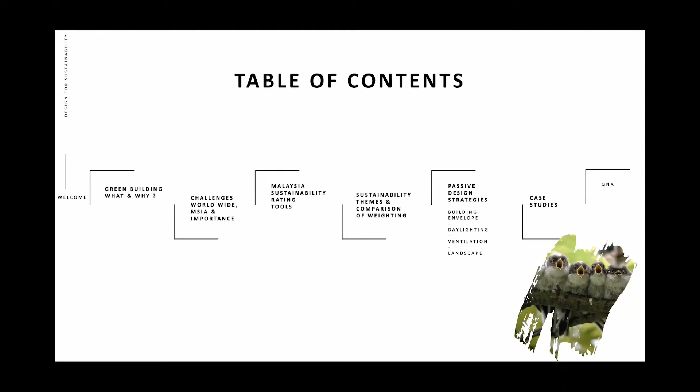I will start with what is green buildings. I believe everyone's heard about green buildings. But to be exact, a green building is an environmentally sustainable building to reduce the overall impacts of the built environment on its surroundings. It focuses on improving the efficient use of resources such as energy, water, materials, while reducing the impacts on human health and also the environment throughout its life cycle. So how can it be achieved? Usually it can be achieved through design, construction, operations, maintenance, and also some renovation projects.

Like the igloo, which is well known as the solution for these conditions, as it's designed to orient the entrance away from the prevailing winds and also to prevent hot air from escaping, so that the interior temperature can reach 15 Celsius when it is negative 26 Celsius on the outside. For the hot, arid climate, the adobe roof and wall have high insulation values and the windows were small to prevent the glaring sun.

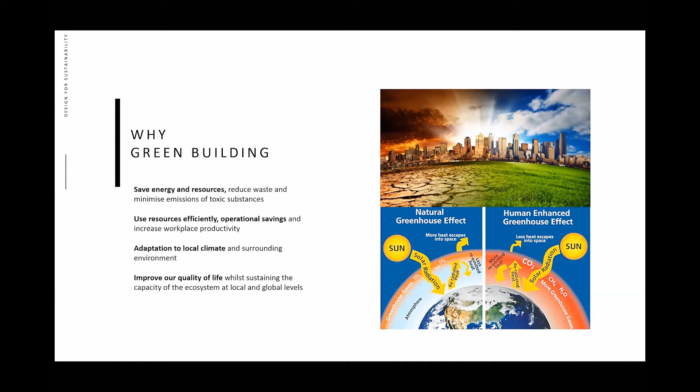So, the contributions of green buildings in the fight against COVID-19. Right. In the times of the COVID-19 pandemic, there are some studies published by the Organisation for Economic Co-operation and Development, abbreviated as OECD, together with the World Green Building Council.

They have highlighted that this new normal has demanded housing schemes emphasize flexibility, community, and sustainability, which they have summarized into 5 pillars: providing the basic functions for epidemic prevention and control, providing convenience and facilities for prevention and control, reducing the risks and preventing infections of the pandemic, protecting the health of the occupants, and stabilizing the work and living environment.

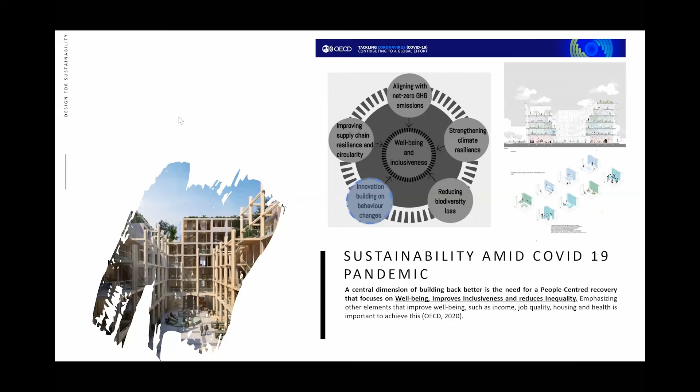Okay, GreenRE, GBI and the KSP Iskandar basically offer assessment for both individual buildings and the whole township. In terms of the tropical focus, Green Pass, MyCREST, Malacca Green Seal, and the PH JKR offer assessment for individual buildings. The LCCF and SUSTES are applicable for townships only.

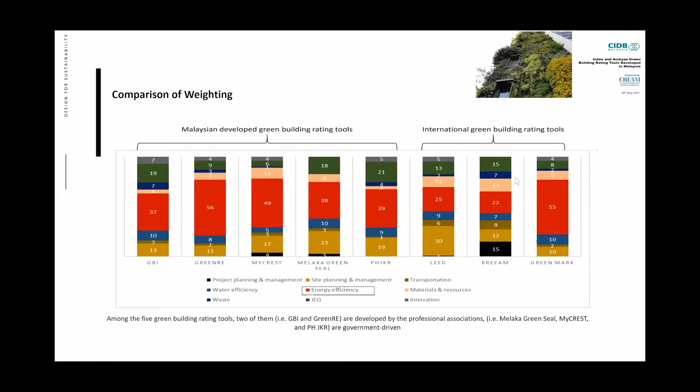Okay, the purpose of green rating tools is to optimize building performance and reduce environmental impacts through the provision of measurements of building environmental effects, and also a standard that allows buildings to be judged objectively based on these 9 primary themes of sustainability, as I mentioned just now: project management and planning, site planning, transportation, energy efficiency, water efficiency, indoor environmental quality or IEQ, material resources, waste management, and innovation.

Okay, now I will move into the passive design strategies. I will start with the building envelope design. So what is a building envelope? I believe that some of you, when you start with your design, after you complete your layout, you start to look into the building envelope. So before that, we will start with the definition of the building envelope.

It is actually the external portion of a building through which thermal energy is transferred. You know, we always look at the aesthetic part of buildings, but when you look at it from the sustainability perspective, we look into how the thermal energy is transferred, because most of the thermal energy will transfer through the building envelope.

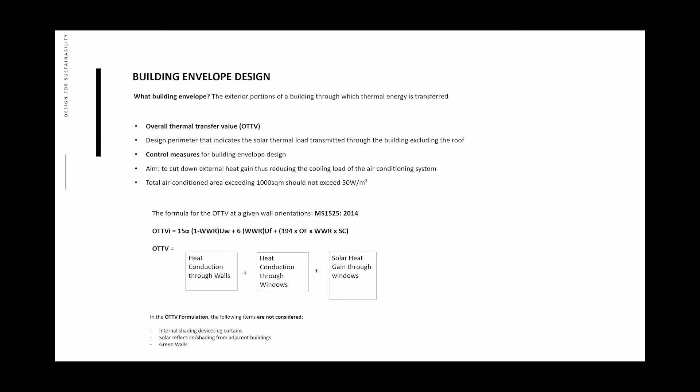However, in the OTTV formulation, there are a few items that won't be considered. For example, internal shading devices like curtains, solar reflection and shading from neighboring or adjacent buildings, and also green walls, because all these things are not permanent or fixed in the building.

So now I will look further at heat conduction through the wall. From the equation I mentioned just now, there is an alpha. Alpha is the color of the wall. When you design a building, some of you would like to have a darker facade design. This will contribute to a larger alpha value compared to lighter colored buildings.

Second is the window to wall ratio. As I mentioned, the size of your openings and the number of your openings will affect the heat transmitted into the space as well. And the U value: I have a calculation of the U value here, because the total U value depends on the thermal resistance of the materials.

Okay, this is an example for a plastered brick wall, with details here. For the external facade, there is cement plastering, then the brick wall, which is covered by plaster on the internal surface too. All these layers sum up to the total U value based on their thermal conductivity, their thickness, and their density.

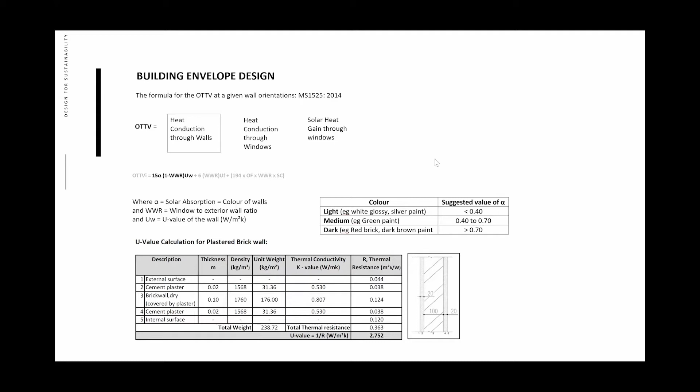Okay, next I will talk about solar transmission through the glass, which is the second part of the OTTV, the heat conduction through the window.

As the sunlight strikes the glazing, part of the solar radiation is transmitted through the glass and proceeds to heat up the interior spaces, because the glass is where the heat actually emits to the spaces. And part of the solar energy is reflected off the glass depending on the angle of incidence.

And part of the solar energy is absorbed into the glass, and then it will re-radiate both inwards and outwards. Some of the light will be reflected outside, and most of the light will probably be transmitted into the internal spaces. So to avoid heat entering the building, it's critical to prevent the initial transmission through the glass.

So from what you can see, the formula of the OTTV for a given wall orientation; of course the building has a few orientations, north, south, east, west, so we have to take all the orientations into consideration. This is the part for heat conduction through the windows. The equation will be 6 times the window to wall ratio and the U value for the glass. So how are we going to get the U value for the glass? We can look further.

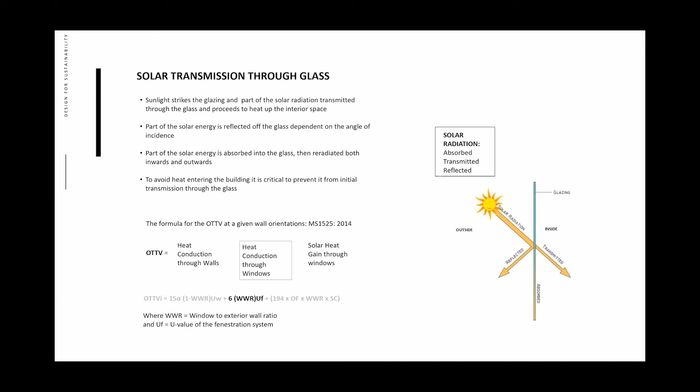Okay, here are the equations of the U value of the glass. It will be based on the glazing type. For single glazing, which is single clear glazing, the U value will be more compared to double glazing with low E glass. So if you have a large U value, it will affect your OTTV. It means the OTTV will be increased.

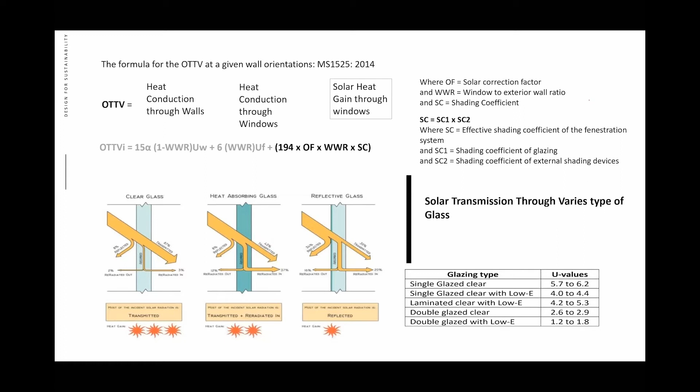So there are some photos about what clear glass is and how heat is transmitted into the spaces. If you are using double glazing or double glazing with low E, the percentage of heat transmitting into the space will probably be lesser compared to buildings using clear glazing.

Okay, this is the solar orientation factor, or OF, and it is another reason that contributes to increasing the OTTV, right? Because of the orientation of the buildings: when you orientate your building towards north and south, the OF is lesser compared to orientating your building towards east and west. So you can see that orientation plays an important role in passive design strategy.

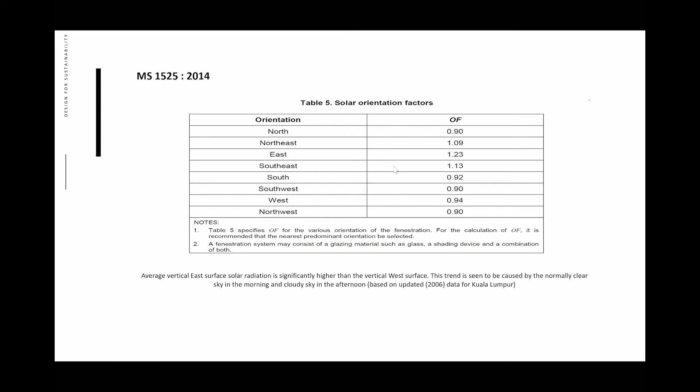Okay, now I will move into the shading device. The shading device is also part of the equation, where the shading device and the use of glazing contribute to the heat transmitting through the window. So what is a shading device? An external shading device is more effective than an internal blind.

Like I mentioned just now, it is a permanent item attached to the building, right? It comes together with construction during the construction period. But an internal blind can be removed anytime. And the external shading device will block direct sunlight from entering the building.

So here are some examples of the types of shading and how they affect the view field of the occupants. If you are using horizontal louvers, you will probably have better views compared to vertical fins, because they won't block your views. And usually you arrange them just above the occupant's eye level.

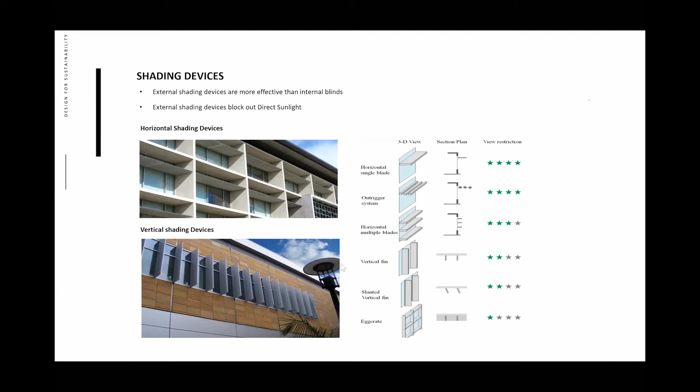Okay, now I will talk about sun path diagrams, because the sun path also affects how we design buildings to adapt to daylight. The sun path shows the path of the sun across the sky. The position of the sun in the sky is defined by two angles: the solar azimuth and the solar altitude. The solar azimuth is the clockwise angle between the north reference and the perpendicular projection of the sun onto the horizontal plane.

Solar altitude, also referred to as the solar elevation angle, is the angle between the sun's position and the horizontal plane. You can see some diagrams of the solar angles there, showing the difference between the solar azimuth and solar altitude. Figure 2 is a sun path diagram of Kuala Lumpur, and the path of the sun is represented by the curve.

So the top curve actually represents the path of the sun for the summer, which is approximately from June 21st to 22nd. And the middle curve will show March 20 to 21 and September. The bottom curve will show the winter, which is December 21st and 22nd. So this particular curve will indicate the location of the sun along the path at particular times of the day.

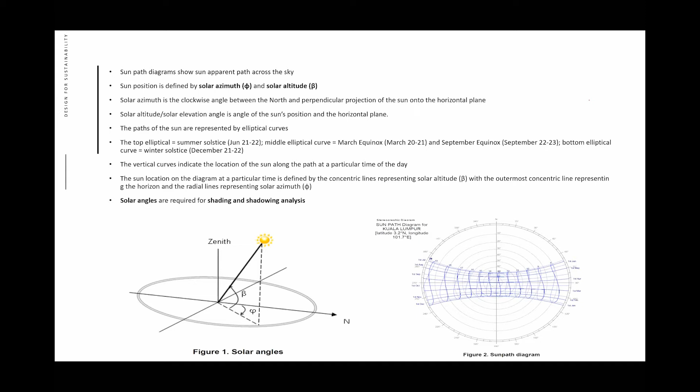Okay, for the sun shading design, you basically can use the shadow angle protractor. To determine the best sun shading design, the shadow angle protractor can be superimposed on your sun path diagram to determine the vertical shadow angles and also the horizontal shadow angles.

So figure 3 shows the superimposition of the shadow angle protractor on the sun path diagram for Kuala Lumpur. This is to determine the vertical shadow angles and the horizontal shadow angles for the northeast facade, and for each facade, the critical vertical and horizontal shadow angles need to be determined to design the appropriate sun shading projections.

And in figure 4, you can see the shadow angles and also some of the solar angles. It illustrates the various solar angles, which are solar altitude and solar azimuth, and the shadow angles, vertical and horizontal, in relation to the vertical and horizontal sun shading. So this is how they design it based on the shadow angles and some of the solar angles.

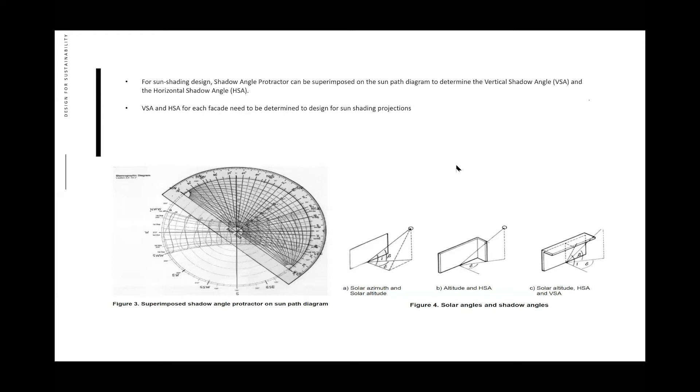Okay. We have covered the OTTV, the shading devices based on the equations, and also the orientation, the color of the buildings, the U value of the wall, and the types of glazing. We include the thermal insulation, which I will talk about on the roof. So the roof U value is worked out from the thermal resistance of the respective roof planes, based on the respective materials making up the roof.

So roof U value refers to the thermal transmittance value of the composite roof, and is inversely proportional to the thermal resistance, which is U equals 1 over R. From MS 1525, the roof of an air-conditioned space shall have a thermal transmittance; from the chart table beside, there are roof weight groups. One is light, another one is heavy roof. A concrete roof is considered a heavy roof because it's above 50 kg per meter square, so the maximum U value shouldn't be more than 0.6.

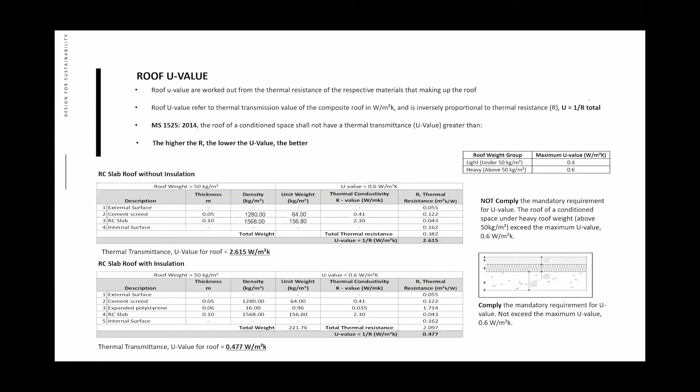Based on these equations and examples, you can conclude that to reduce energy usage in a building and enhance the building envelope design, you have to orientate your building intelligently, facing north and south instead of east and west, and use materials to control the heat.

The alpha value I mentioned earlier shows that a lighter color will help reduce the OTTV as well. So use light color paints for your wall, and locate and size the windows smartly based on the window-to-wall ratio.

Choose the glazing type correctly. Instead of clear glass, if you want to reduce or get lesser heat into the spaces, you should use double glazing and low-E glass, and provide shading to the window. You can apply horizontal or vertical shading devices to block direct heat into the spaces.

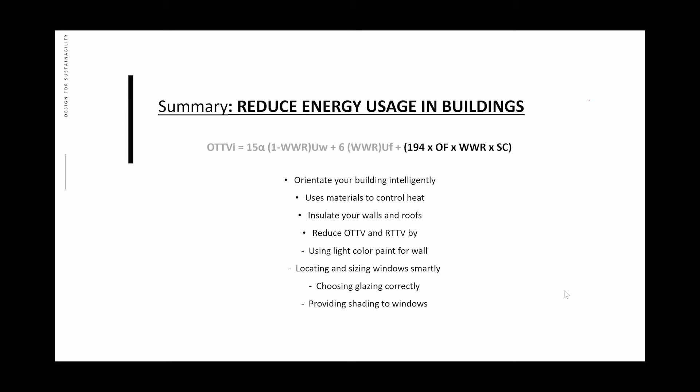Now I will move into daylighting. In Malaysia, we always design with daylighting. However, we have to keep in mind that daylighting is not equal to sunlight.

If you directly utilize sunlight, you get free heat and will heat up the spaces. Instead, you should look into the diffuse or indirect light, which is daylight, because it provides free light into the spaces.

So what is direct radiation and what is diffuse radiation? Direct radiation comes straight from the sun through the atmosphere, while diffuse radiation is radiation reflected from the entire sky.

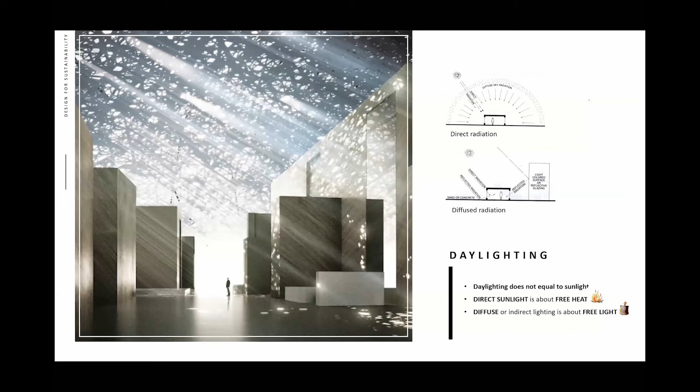Why would one be interested in bringing daylight into buildings? Firstly, it helps illuminate the building interior passively. You can save money by bringing daylight into the space to light it up, reducing the consumption of electrical energy.

In terms of cost saving, daylight could also be applied as a design element to lift up the spaces. I believe many students like to apply and explore using light and shadow in their buildings. Light is a very important tool for architecture design.

Why? Because first it brings architecture to life. You can see some images that show the experience of the user, how the user appreciates the spaces, and it can also be used to show the form and meaning of the spaces.

It's something like a journey of the spaces, where the sun comes in and creates different feelings for the user as well.

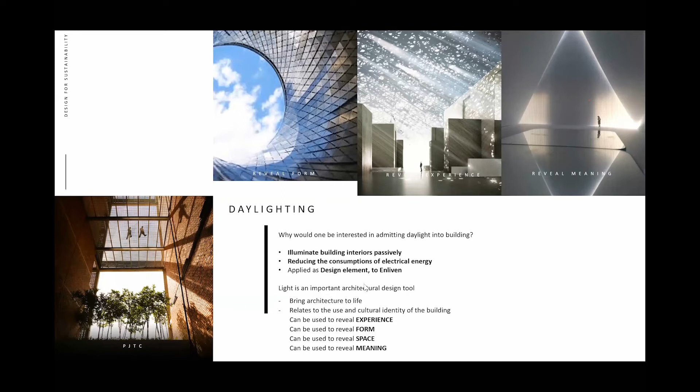There are a few ways to bring daylight into buildings. First is the light shelf, where daylight is reflected off the ceilings and enters into the building interior.

The placement of the light shelf is usually above eye level so it won't block the view of the occupants. So what is a light shelf? It's basically a horizontal plane that protrudes out from the vertical plane of your window.

The second strategy to bring daylight into a building is rooftop openings, such as skylights, because they help promote or bring daylight deep into the building interiors.

It is usually located above the occupant's eye level, and it's able to offer views of the sky and very tall vegetation and buildings.

For this type, it's a window form located either on the vertical plane of any principal elevation of the buildings, or as a vertical penetration on the roof surface. When placed on one of the vertical envelope faces of a building, its ability to admit light more deeply into the space is better than vertical windows.

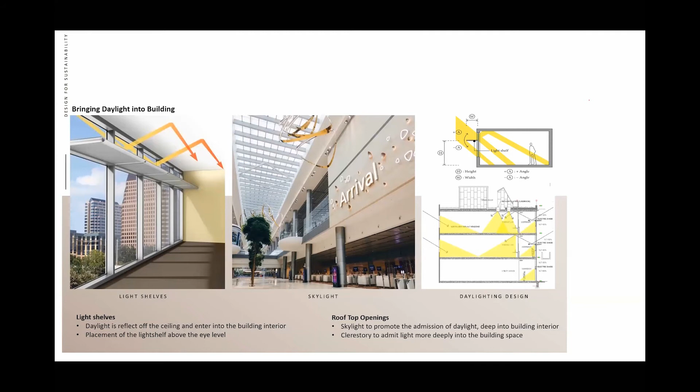So in order to bring in daylight, there are a few strategies: one is utilizing the light shelf on the horizontal plane, secondly the rooftop opening which is a skylight, followed by borrowing light from perimeter spaces. You can also combine all three strategies together.

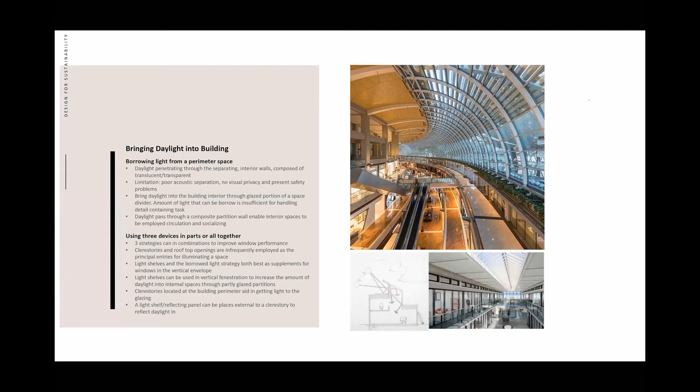Next, I will move into talking about how you go about designing for daylight.

There is the use of vegetation. You can basically use vegetation for controlling the admission of daylight, employing vegetation to reduce daylight brightness or glare into the spaces, and also consider the reflectance of surfaces external to the building.

Surfaces that have the highest reflectance, such as glossy surfaces, can actually reflect light into the building. The choice of external surface near a building can either enhance or detract from the character of illuminance within a building. For example, water bodies, liquid, or frozen surfaces display high reflectance, so these all have the potential of reflecting light into the building.

Alternatively, building materials like aluminium, standard glass, stainless steel, and concrete with a high sand content can also be highly reflective.

Narrow width of the building for daylight penetration will be the second way of designing for daylighting, where for single-sided spaces, a standard rule of thumb suggests that the depth daylight will penetrate usefully is equal to approximately 2.5 times the height of the window. That is the rule of thumb for designing daylight penetration into spaces.

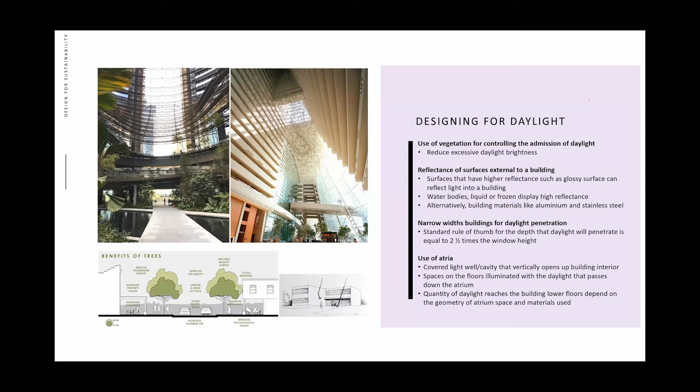Also the use of atriums, covered light wells, cavities that open up vertically through building interiors. Spaces on the floors surrounding atriums can be illuminated with daylight that passes down the atrium. The quantity of daylight that reaches the lower floors of the building will depend on the means used to admit daylight into the atrium's volume, the geometry of the atrium space, and also the choice of materials used.

So, appropriate orientations for admitting daylight: the path for the direct beam components of the solar radiation will generally coincide with the primary view fields of the building occupants who look out of this window. So it will cause visual discomfort because of the brightness.

So suitable window treatments are needed to block the direct beam sunlight when glazing is located on the principal solar directions. When you have a glazing or window design that faces the daylight emission directly, it will somehow cause discomfort for the user. So we have to use louvers or other treatments for the window to prevent or reduce the glare entering the spaces.

Using the window in the vertical wall as a characteristic, windows placed higher in a wall will provide a more uniform distribution of daylight throughout a space. By employing higher windows, the window surface will be less likely to interrupt the occupants' field of view and will reduce the possibility that occupants experience glare conditions.

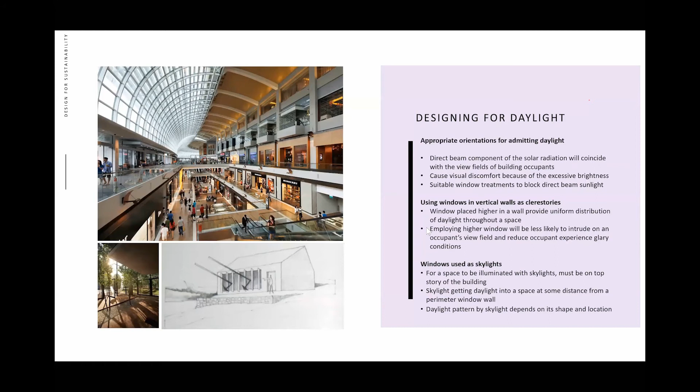Daylight provided by vertical windows tends to be brighter near the window wall, and progressively dimmer as you move away from the envelope. So daylight patterns created by the skylight depend on the shape of the skylight and also its location. So if you are going to use windows as a skylight, all this is what you have to consider, because it will affect the patterns of your daylight.

Next I will talk about controlling radiation transmission through the glazing. Like I mentioned previously in the building envelope, the selection of glazing materials is important, along with how you actually assemble it, to reduce overload and reduce the transmission of heat into the spaces.

Some of the solar radiation entering the space or building can also cause occupant discomfort, in terms of visual discomfort and also thermal discomfort, if you fail to control the radiation transmission through the glazing. This is the effect or impact of failing to control the radiation transmission.

How do you control it? You can use devices external to the window to control the transmission of radiation, like some of the common shading devices being used now, such as horizontal overhangs and vertical fins. They are placed above and alongside the window, and these overhangs and fins can be used to create an egg crate assembly attached to the external building surface.

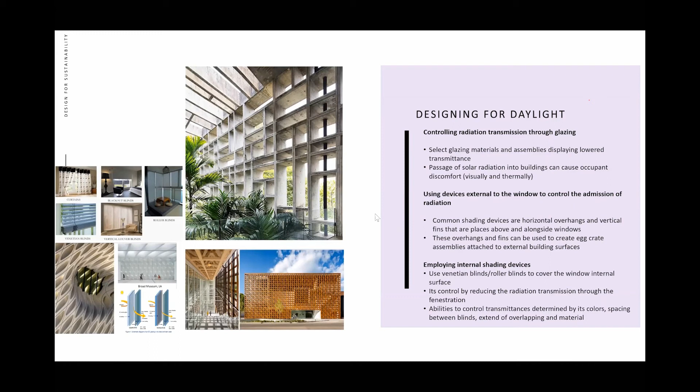Daylight factors—I think most of you have heard about daylight factors before, right? Okay, so what is a daylight factor?

So daylight factor is basically used to describe the presence of daylight in a building. It describes how much daylight falls onto the surface of a building's spaces as the light passes through the openings in the building envelope.

So daylight factor functions as a metric to measure or predict the daylight present in buildings, and it is defined as the ratio of the illuminance measured at a point within the building to the external illuminance. So it's the internal illuminance, and it will be a ratio of internal illuminance to external illuminance.

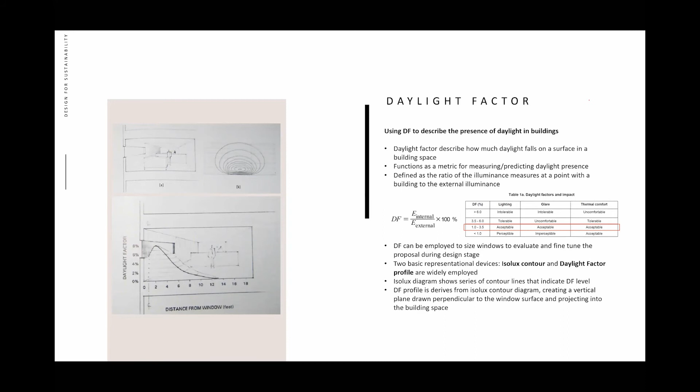And it will create vertical planes drawn perpendicular to the window surface and projecting into the building space. So from here you basically can see the isolux diagrams obtained from the spaces, and from there they will translate into the daylight factor profile, which is generated from the isolux contour.

So from the MS1525, we also talk about a good daylighting system. There are a few things that have to be taken into consideration during the preliminary design stage. First is the space orientation. The physical shape, size, and optical properties of the glazing through which the daylight will transmit or penetrate. The internal wall, floor, and ceiling surface properties, like what their colors and reflectivities are.

Next will be the visual contrast between adjacent surfaces, like between the walls and the ceilings, and also protection from visual discomfort, like glare caused by external and internal building elements. So conventional and innovative daylight strategies transport and distribute the light into the buildings, and the purpose is to reduce the need for artificial lighting without increasing solar heat gains.

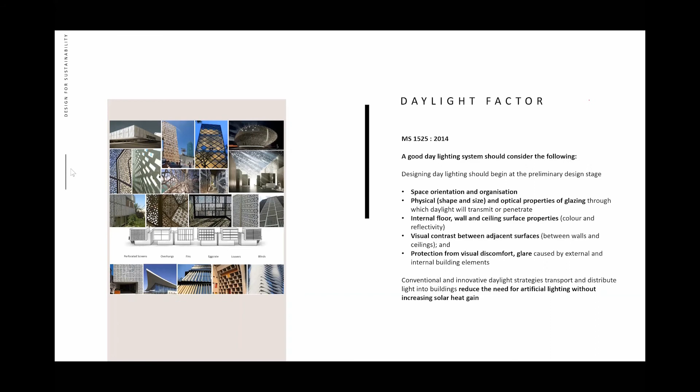So now I will move into the next strategy, which is natural ventilation. Natural ventilation uses the natural force of the wind to deliver sufficient fresh air and air changes to ventilate enclosed spaces without active temperature control or mechanical systems, which will be more cost saving in a way. However, fresh air is required in the buildings to alleviate odors and also improve the IEQ of the spaces.

The provision of naturally ventilated lobby areas, corridors, lift cores, or staircases should be encouraged, because it would be good to have natural ventilation to reduce the use of energy. And it will also help to comply with the requirements from the fire authorities for smoke venting of the spaces if you have natural ventilation in the spaces.

So in some cases, spill air from the adjacent spaces is insufficient. So it has to be sufficient to provide the required air change to ventilate the spaces and provide thermal comfort with reduced energy. Natural ventilation strategies depend on the movement of air through spaces to equalize the pressures. There are two methods to provide natural ventilation. One is cross ventilation. Another one is stack ventilation. I think you guys have roughly read through this before, what cross ventilation and stack ventilation are.

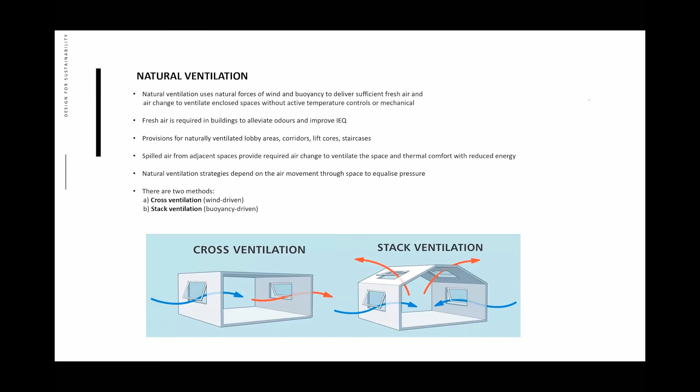But what is a good ventilation design? A good cross ventilation design should consider the following. You have to orientate the buildings to maximize the surface exposed to the prevailing wind. Provide the inlet and the outlet windows. And use architectural features like wing walls or parapets to create positive and negative pressure areas to induce cross ventilation. And you can provide openings on opposite walls to optimize cross ventilation effectively.

However, if this is not possible, the openings can still be placed on the adjacent wall. Design openings to be easily accessible and operable by the occupants, and try to avoid any obstructions between the inlets and the outlets. It has to be free, so it will encourage the wind to flow through the spaces, and have equal inlet and outlet areas to maximize the airflow.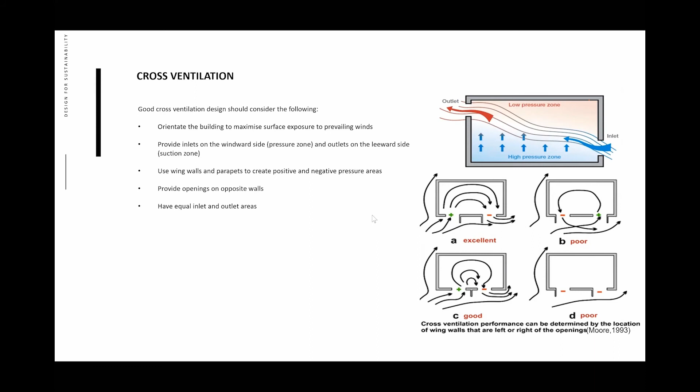Besides that, a good cross ventilation design should also consider designing the outlet openings to be slightly larger than the inlet openings, and try to locate the outlet openings on the windward sides at the occupant's area level, and use good site planning like landscaping and planting strategies to cool the incoming air.

So from the image, you can see the small inlets and large outlets. It will encourage more air to flow in if you have a large outlet, because it will increase the wind speed.

And the types of opening will be according to the building types and the climatic conditions, like the type of building that you're going to design. Maybe you are designing a residential building or a commercial building, and also in terms of climatic conditions as well. When you're designing buildings in different countries, you have to consider the climatic conditions of that particular country.

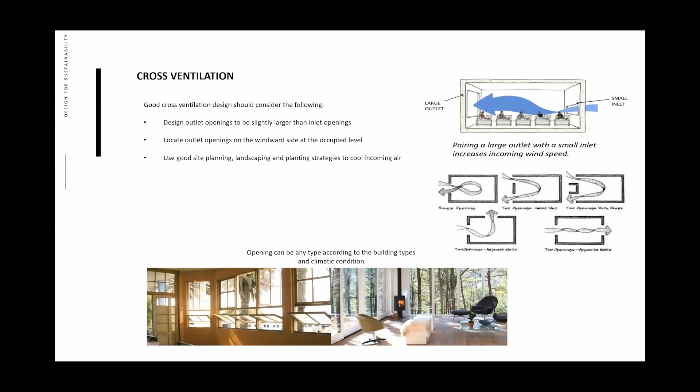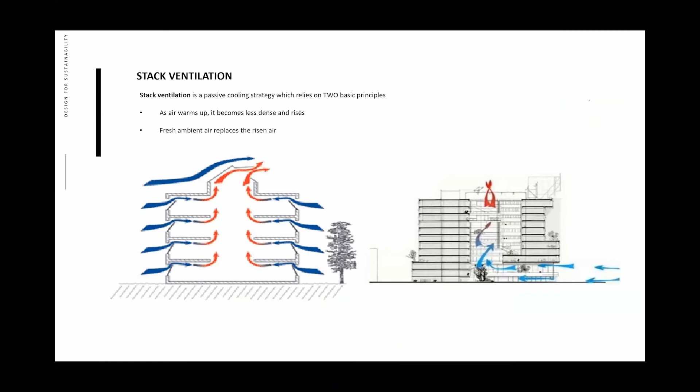Stack ventilation. Stack ventilation is a passive cooling strategy which depends on two basic principles: when the air warms up, it becomes less dense and will rise, and the fresh ambient air will replace the rising air. So there are some images of how the air comes in from the openings into the spaces, and rises to the top.

Okay, for good stack ventilation, there are a few things that have to be taken into consideration. You have to provide at least two ventilation openings, one closest to the floor, which is the inlet, and the other higher in the space, which is the outlet. And maximize the vertical distance between these two sets of openings. Increasing the differential height will also produce a better airflow between the spaces, and use equal inlet and outlet areas to maximize the airflow.

Next will be providing openings in the stairwell or other continuous vertical elements so that they can actually work as a stack. Such spaces may also be used to ventilate the adjacent spaces because their stack height allows them to displace large volumes of air. And you could also use louvers on inlets to channel air intake, and also use some architectural features just to exhaust the hot indoor air outside the buildings.

With low incidence of significant wind force or low wind speeds, to achieve sensible air movement for thermal comfort, manage additional air movement with mechanical means. It means that if you have a low wind force or low wind speed, you might need some additional mechanical means to achieve thermal comfort or the necessary air movement.

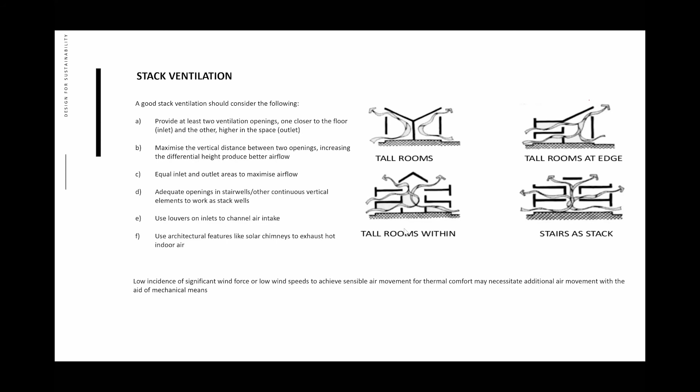Now I will move into the landscaping strategy. For the landscaping strategy, there is vegetation and there are courtyard spaces. You can actually utilize landscaping and shading devices as well, a combination of all of it. Vegetation can be used to shade the buildings and also help to create microclimates around the buildings. The courtyard spaces basically provide a cool and semi-private interior microclimate from which to draw cool air into the buildings.

And landscaping and shading devices could be combined to provide areas of cooling around the buildings. You can see some images of how the trees actually provide shade to the buildings. And also there is a courtyard inside to cool the spaces.

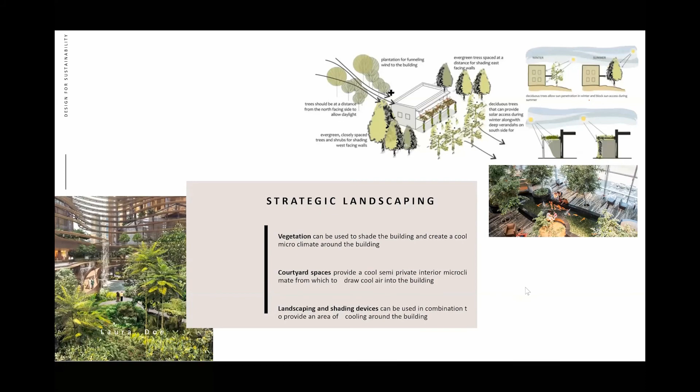Okay, now I will move into the case studies. The first case that I will talk about is the PAM Centre. I think most of you already know where the PAM Centre is. The PAM Centre is the headquarters of the Malaysian Institute of Architects and is located at Jalan Tandok in Bangsar. It was constructed on a narrow site previously occupied by 4-storey buildings. It was awarded a GBI Platinum rating, making it one of the greenest buildings built to date.

The most striking feature of the building is its powder-coated black aluminium screen, which we call a breathable skin that wraps around the facade.

Stepping diagonally across the main facades are a series of double and triple garden atriums that follow the flow of the straight-flight steel staircase that links the floors of the building both physically and visually. The built-up area is about 3,782 square meters, which contains all the space to accommodate the institute's activities and events, such as meeting rooms, council ballrooms, the exhibition hall, a cafe, some office spaces and a rooftop sky bar at the top of the roof.

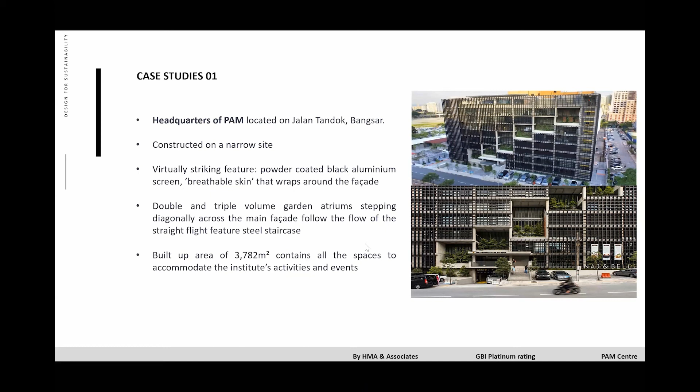Some sustainability features have been adopted here, which are the reason for selecting this as one of the case studies, due to the GBI Platinum rating this building gained. First, they maximized natural daylight, where more than 50% of the spaces are illuminated with natural light through large glass openings and skylights. The northwest facade has clear glass, while the skylight above the flight staircase lights up the spaces.

Then they maximized natural ventilation and the thermal comfort of the spaces. There are openings on all the building sides to facilitate cross ventilation, and a stack ventilation effect is created by having multi-level atriums with openings, and all the public and circulation spaces are naturally ventilated too.

The interesting part of the building is that they're reusing the existing structures. The previous 4-story structure has been retained and incorporated into the new building. For materials and the building process, they tried to use recycled content, regional materials, and materials with low levels of harmful VOC.

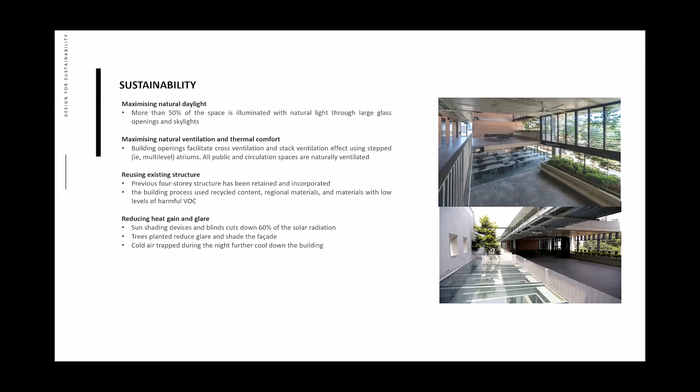For energy, there is a high coefficient of performance variable refrigerant flow air conditioning system, which helps to reduce energy consumption. Also, the building automation system has an energy management system to improve energy consumption and user friendliness by controlling general lighting, using photo and motion sensors. They also have energy monitoring using digital power meters, water usage monitoring using digital water meters, and educational displays analyzing the building's energy performance.

They're also using renewable energy, with a solar photovoltaic system installed on the rooftop. They also save water by having water-efficient fittings, which resulted in 55% water savings, and all the water requirements for flushing and irrigation are fully met by rainwater harvesting, used for toilet flushing and irrigation.

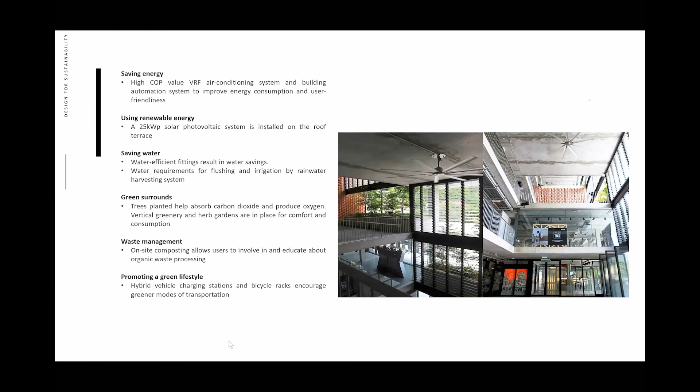They also promote a green lifestyle by having hybrid vehicle charging stations and bicycle racks to encourage greener modes of transportation. So they encourage us to come by bicycle, to carpool, or to buy a hybrid car.

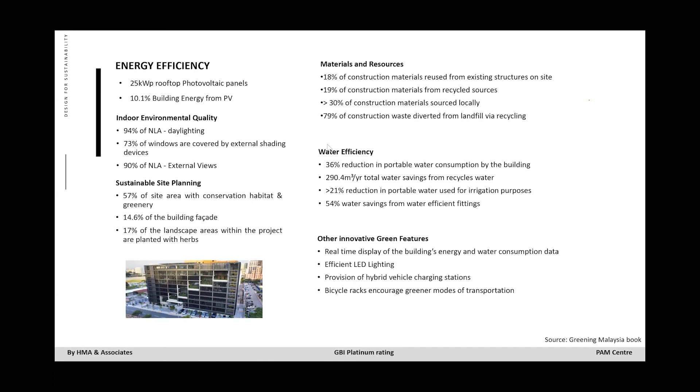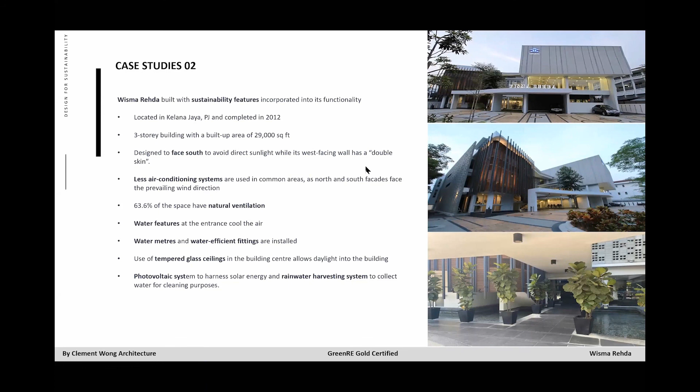Here are some of the photos. I think most of you are probably quite familiar with this building. It is a GreenRE Gold certified building. And here is some information about the criteria in assessing the building, like the building envelope and thermal performance: the OTTV is less than 50 watts per square meter, and what is the U value for the wall, the RTTV. From the information you can see it complies with the mandatory requirements to achieve certain ratings.

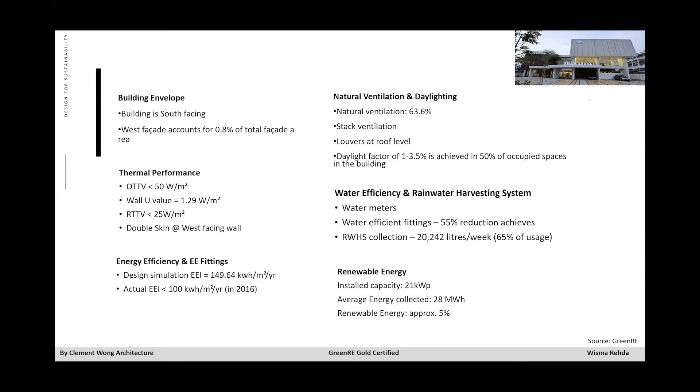By using water-efficient fittings, it helps reduce 55% of the required water in the building. And there is the rainwater collection based on usage, so it can utilize 65% of the total required usage. And there's renewable energy as well, showing on average how much energy can be collected. Okay, I think that's all from me today.